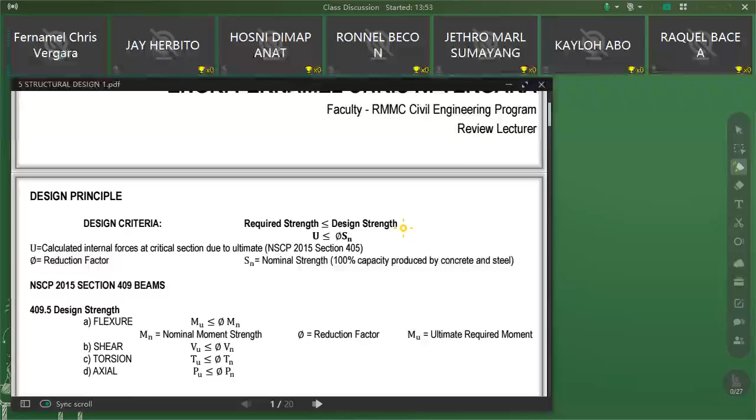So when you say ultimate strength design, it is following the load combination. Magkakaroon na tayo ng load combination dito sa ultimate strength design. Unlike doon sa WSD or working stress design na wala pa tayong load combination kapag nag-a-add tayo ng working na dead load at saka ng live load.

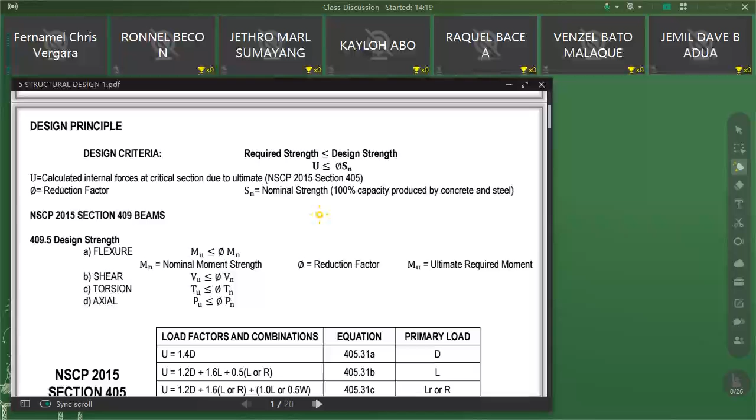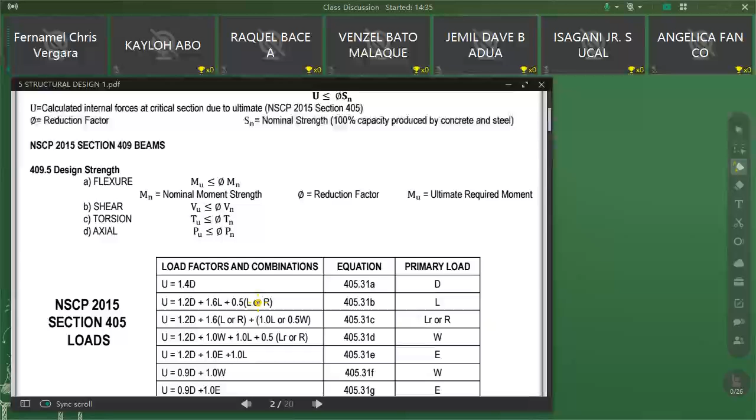Kung mapapansin nyo doon sa example na binigay ko sa inyo, kapag ina-add natin yung dead load tsaka live load, gumagamit tayo ng load factor in combination. So here are the different load factor and combination na ginagamit natin. But actually for the very common combination here is the first one, the second, and yung may mga earthquake.

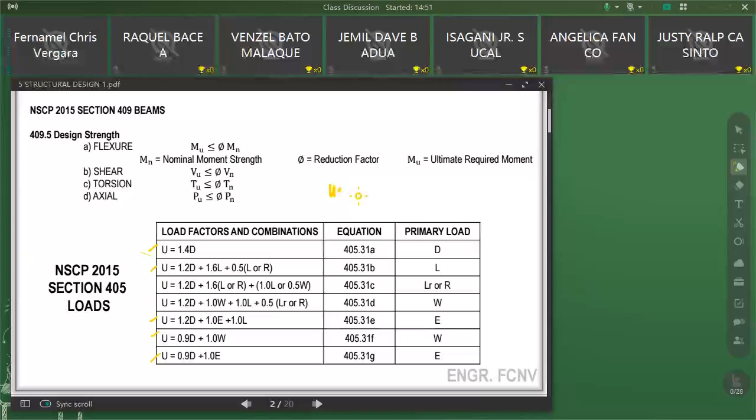Ito sila yung mga combination na magagamit talaga natin, parati talagang nagagamit. At saka kung sa board exam naman yung pinag-uusapan, yung load combination ng 1.2 dead load plus 1.6 live load, yan yung pinaka-common. So sa halos lahat ng problem na makikita nyo, ito yung ginagamit, kasi halos ng binibigay lang dito is dead load and live load lang.

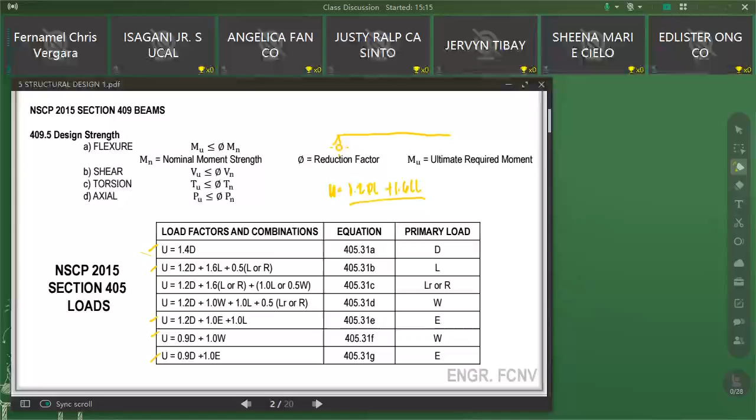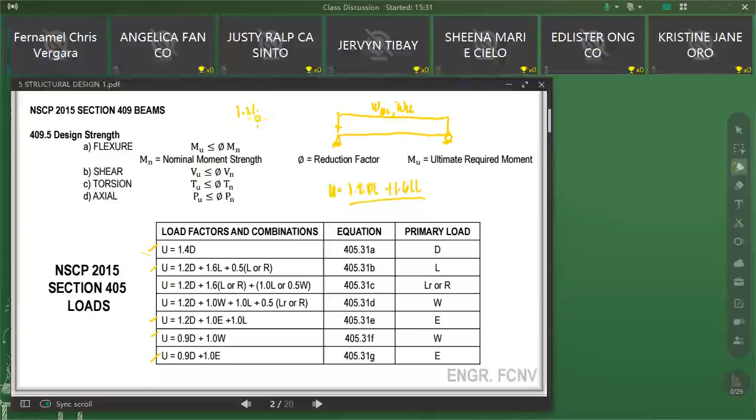So if you combine two loads, kunwari magko-combine ka ng dalawang load, say for example doon kasi sa WSD kapag nagko-combine tayo ng dalawang load, ina-add lang diretso natin. So for example, meron tayo dito W ng dead load and W ng live load. So kapag gusto mo yan silang i-add, you need to use the load combination 1.2 W dead load plus 1.6 W live load to get the ultimate load here because this is ultimate strength design.

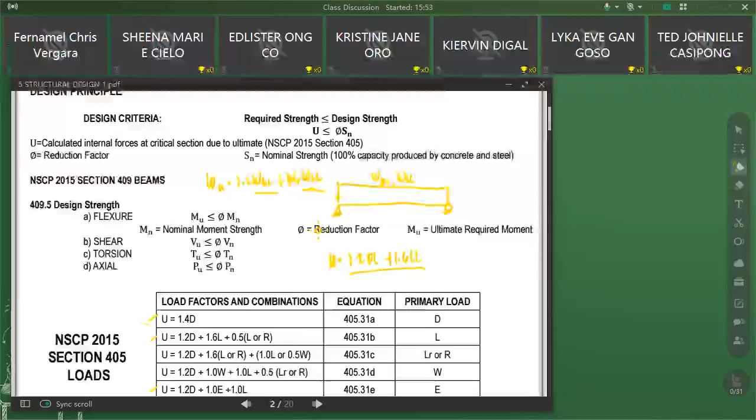Kapag WSD naman yung previous topic natin, pwede mo lang i-add diretso tong W live load and W dead load. So i-add mo lang yan diretso, no need to load factor doon sa WSD. Since service loads yung mga ginagamit natin kapag WSD, mga service load, hindi ultimate load.

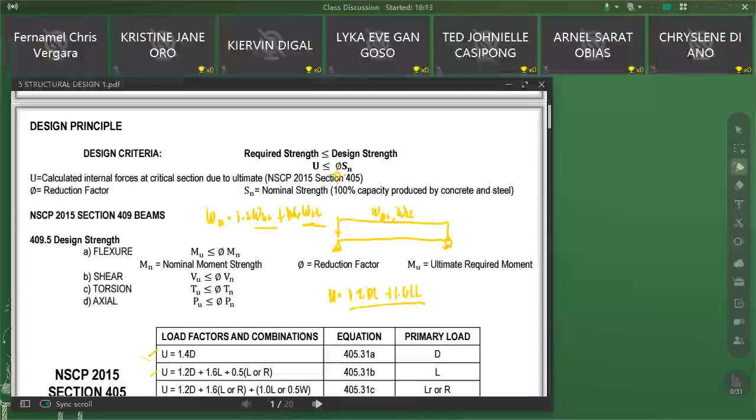Dito ultimate kasi yung ginagamit natin. So sabi dito sa USD, from the design criteria, the required strength U should be less than or equal to the reduction factor times the nominal strength or the design strength. This is what we call the nominal strength.

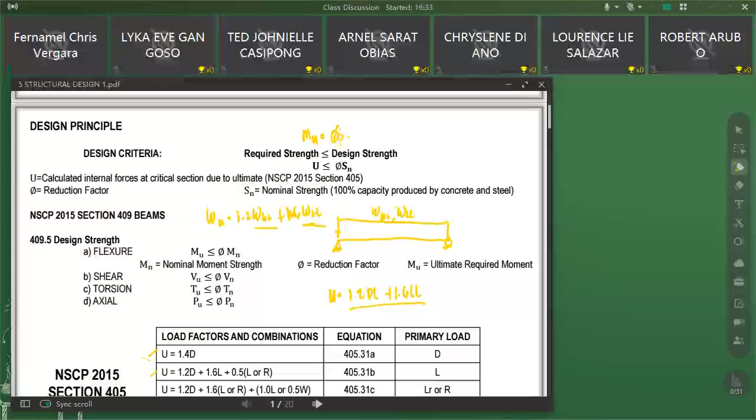So dito sa flexure on beams, ang magiging concern natin dito, of course, from the word flexure is yung bending, yung moment. So if you want to get the ultimate bending moment, it is equal to the reduction factor times the nominal moment. So ito yung magiging equation natin for the ultimate bending moment, which is yung halos concern natin talaga dito, kapag flexure on beams.

So okay, ayun, nakalagay naman dito. The ultimate moment should be less than or equal to the nominal moment times the reduction factor. So phi here is the reduction factor, Mu is the ultimate required moment, and Mn is the nominal moment. So for the shear, this is the ultimate shear, nominal shear.

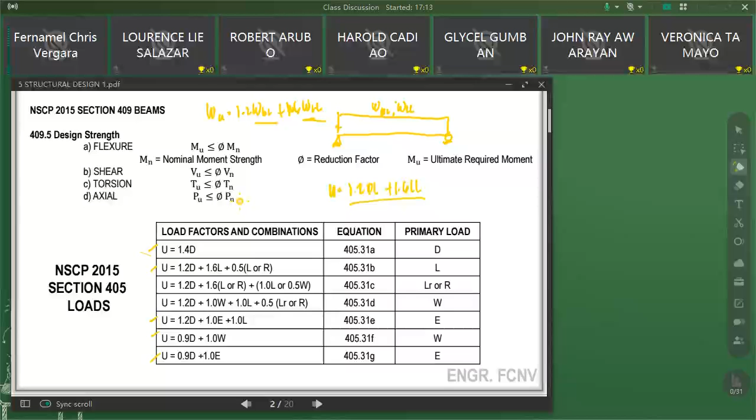Ultimate torsion, nominal torsion, ultimate axial load, nominal axial load. So, parang ganyan lang yan.

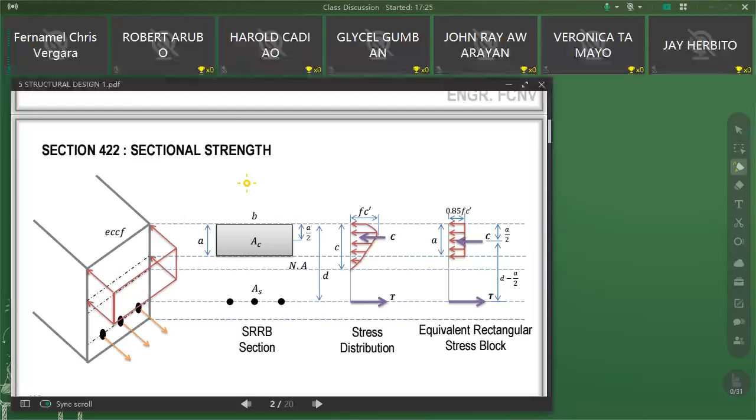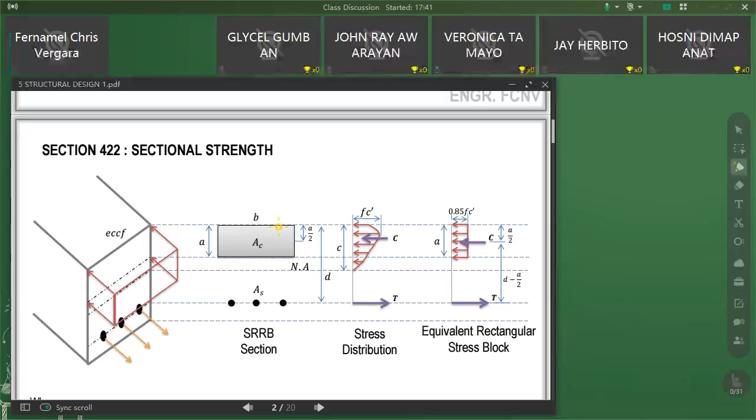Sa analysis ng USD, halos magkaparehas lang sila dun sa WSD, 'no? Ang magiging figure lang natin dito is medyo iba lang siya. Kasi dun sa WSD, yung ginagamit natin na area ng concrete doon is yung whole area na nasa taas ng neutral axis, 'di ba? Kapag kinuha natin yung beam natin, yung buong area dito sa taas ng neutral axis, yun yung kino-consider natin sa WSD, 'no? Dun sa previous topic natin, yung prelim topic natin.

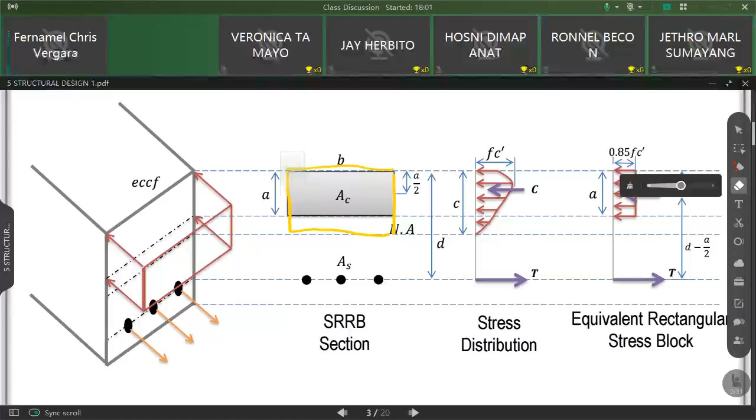But for the USD, Ultimate Strength Design or LRFD, 'no? Ang ginagamit lang natin dito is a part, part lang siya ng compression concrete. This is the compression side, part lang siya ng compression concrete dito. Hindi natin ginagamit yung whole concrete dito sa compression side. So yung concrete dito na ginagamit lang natin, yung area ng compression concrete na ginagamit lang natin dito is may depth na siya A, may depth siyang A, 'no? Doon kasi sa WSD, yung whole area dito sa compression side, yun yung ginagamit natin.

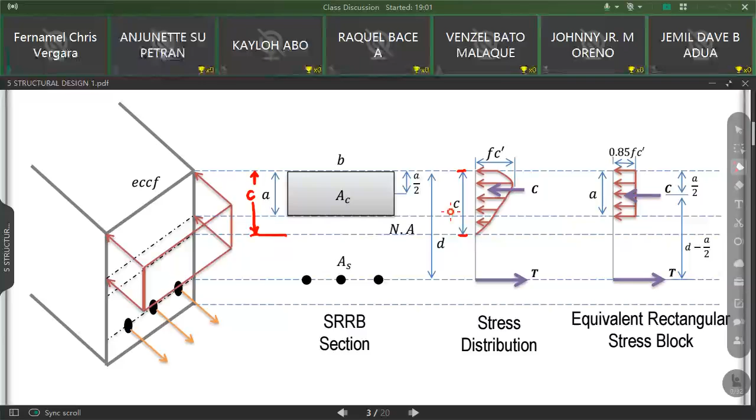And then may depth yun na X, 'di ba? May depth na X. Dito naman, at yung X doon sa WSD, yung definition ni X is the distance from neutral axis to the outermost compression fiber. So dito naman, yun naman si C. Itong si C is the distance from neutral axis to the outermost compression fiber. Pero itong C na 'to, hindi na 'to siya ang depth ng concrete na nagre-resist ng bending dito. Yung depth ng concrete na nagre-resist ng bending sa USD or sa Ultimate Strength Design is itong si A na lang.

Kung doon sa WSD, ulitin ko, yung whole concrete sa compression side yung ginagamit natin, dito sa USD naman, hindi na natin ginagamit yung whole, part lang ng compression concrete yung ginagamit natin, which is itong area na A times B. Ito lang yun, okay? So ngayon, ang procedure dito is ganito lang yung gagawin nyo.

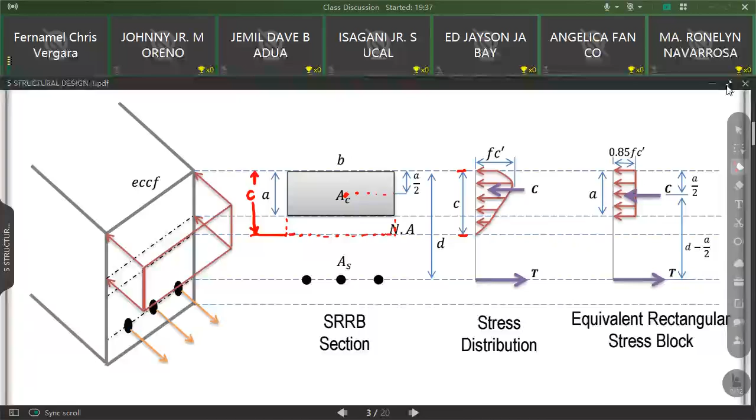First is, idodraw mo yung cross section, parehas pa rin, no? Idodraw natin yung cross section. After mong madraw yung cross section ng ating beam, ika-crack mo na yan. Okay, say for example, this is AS, singly reinforced na lang muna. Ika-crack mo yan dun sa may neutral axis niya banda. If na-draw mo na or naka-assume ka na ng horizontal line which represents your neutral axis, i-draw mo na yung concrete, part lang ng concrete sa taas.

Say this is the concrete, the part of the concrete which will resist the compression, or the bending, okay? For the compression side. So ito may depth na A and ito may depth na C. Then, here, you have AS.

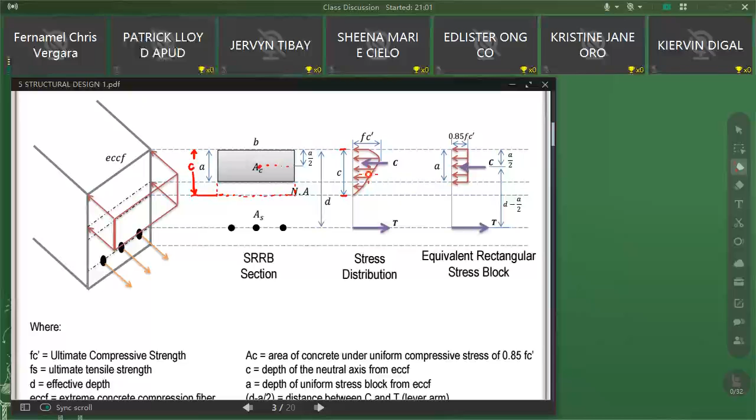Now, for WSD, hindi tayo pwedeng mag-analyze ng steel at saka concrete ng sabay, no? So ang ginagawa natin dun sa WSD, kung matatandaan ninyo, kino-convert natin si steel into concrete. Pero dito, sa USD or Ultimate Strength Design, ang ginagawa dito, hindi na natin kino-convert yung steel sa concrete. Hindi na natin kailangan i-convert ito sa concrete kasi yung ina-analyze dito is mga forces na, 'no? Unlike doon, yung mga area yung ina-analyze kasi doon, eh, nakabase sa area at saka nakabase sa flexural stress formula sa MC/I. So kapag gagamit ka kasi ng MC/I, dapat homogeneous yung section. Dapat isang element lang. Kung steel, steel lang. Kung RC, RC lang. But for the USD, for this topic, hindi na natin kailangan i-convert yung ating bakal sa concrete. Kasi forces naman yung ating ina-analyze dito.

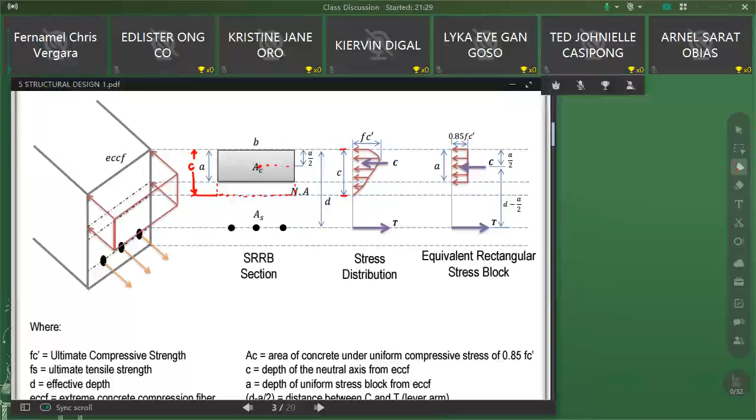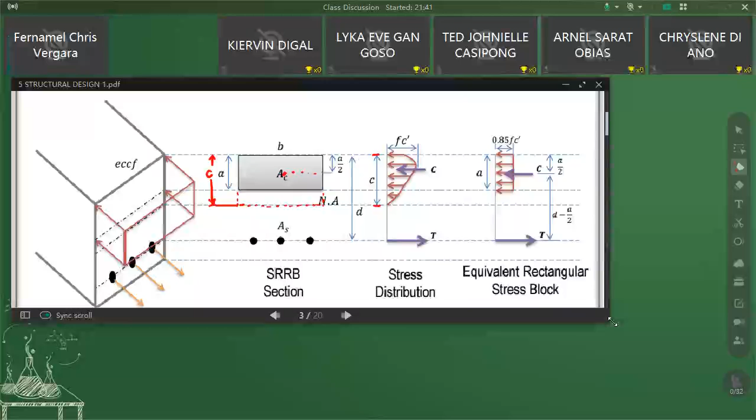Okay, ngayon, if na-crack na natin yung ating beam, and then, hanap mo na si A, si C, at saka yung effective depth. Of course, alam niyo na siguro kung hanapin si effective depth, kasi napakaimportante ng effective depth. So, okay, ito gagawin ko. Wait lang, gagawin ko dito.

Ganito. So, if na-crack mo na yung iyong beam, ganito yung makikita mo dapat, 'no? Yung part lang ng concrete sa taas ng neutral axis, ayan. Hindi siya aabot sa neutral axis, eh. So, this is your A, which is the depth of the compression block that will resist the bending. And this is C, which is the distance from neutral axis to the extreme compression concrete fiber.

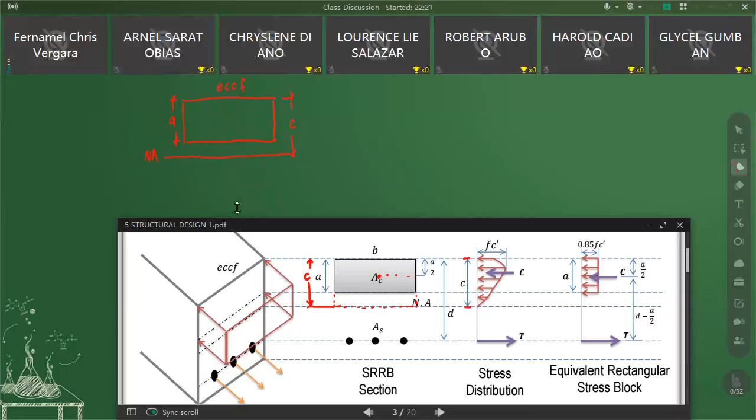And this is AS. Now, let's expose the forces here. The steel here is on the tension side, this is for the tension side and this is for the compression side. So the steel here, of course, has a tensile force.

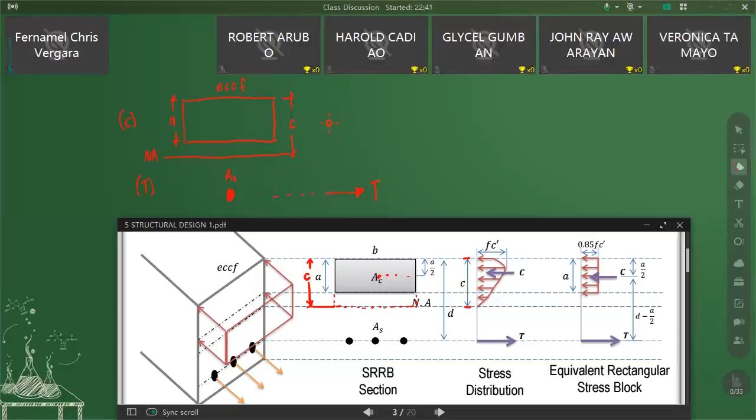And up here, get the centroid or center of gravity of the compressive area of concrete remaining. Since this is rectangular, its center of gravity is right in the middle. Then get the distance going up. If this is A, this will be A over 2. And going down, this will also be A over 2. Now, at its centroid, the compressive force C will act.

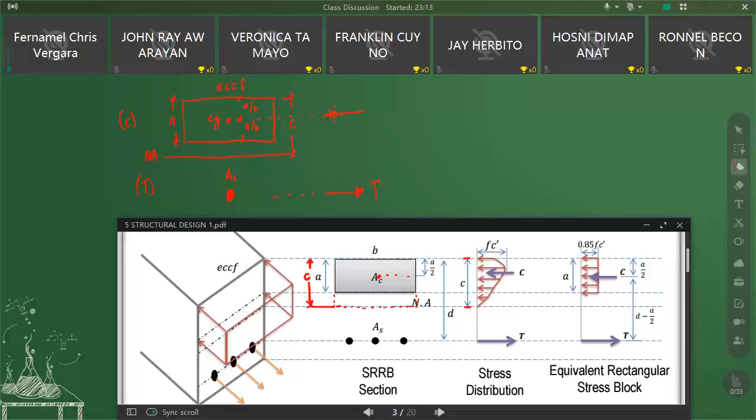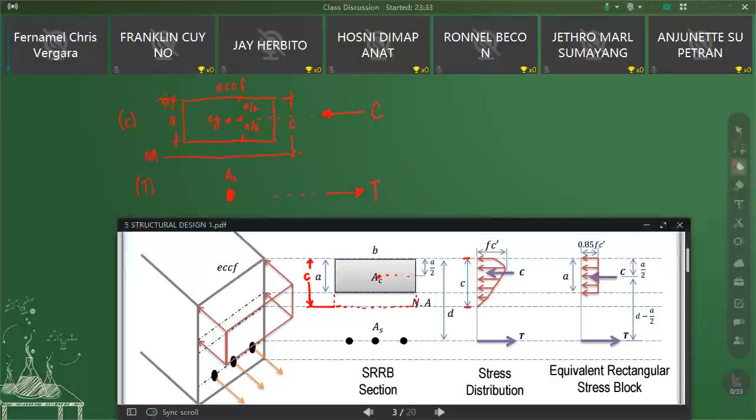You might get confused here. This small c, this is the distance from the neutral axis to the outermost compression fiber. This big C, this is a force. This is a force. Now, we also get the distance from the extreme compression fiber going to AS. If you remember, this is your effective depth D. That is the depth.

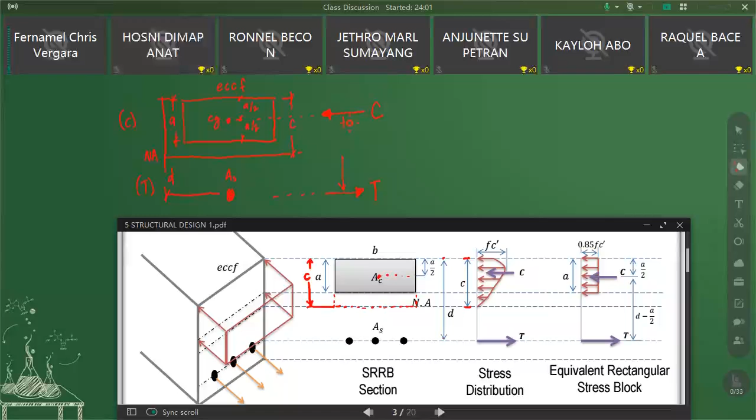Here, going to the area of steel. Centroid of steel, going to the extreme concrete compression fiber. That is your effective depth D. So therefore, if that is the effective depth D, then this moment arm here from the two forces, C and T, will be equal to D minus A over 2.

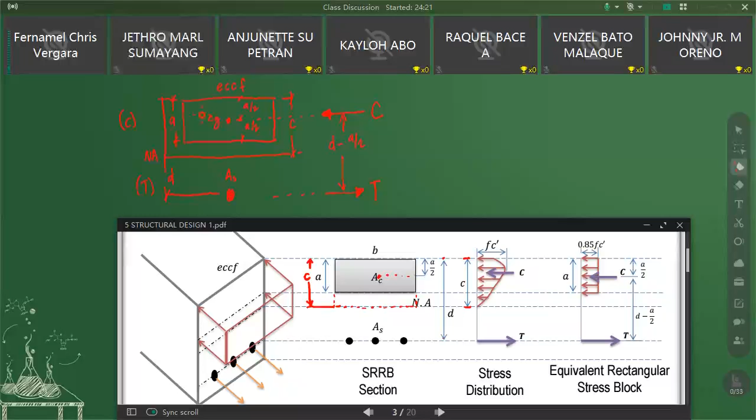This might be familiar to you. When you have two forces positioned like this, with a distance between each other, this creates a couple, which is the moment produced in our beam. This will be the interior and will represent the nominal moment created in the beam. So this will be the direction of the moment here. This is your couple which will represent the nominal moment.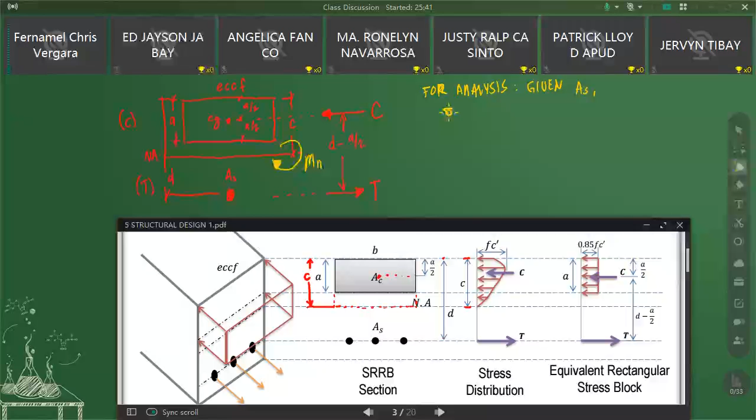And the first step you do is sum up forces horizontal equal to 0. Say rightward force here is positive. So therefore, you have T minus C equal to 0. Therefore, you have tension equal to compression.

So after that, you will substitute the equivalent of these forces. What's the equivalent of T? T is equal to AS, Fs when non-yielding. When it yields, this Fs will be replaced by Fy. AS, Fy. I hope you watched the video I sent you to recap this.

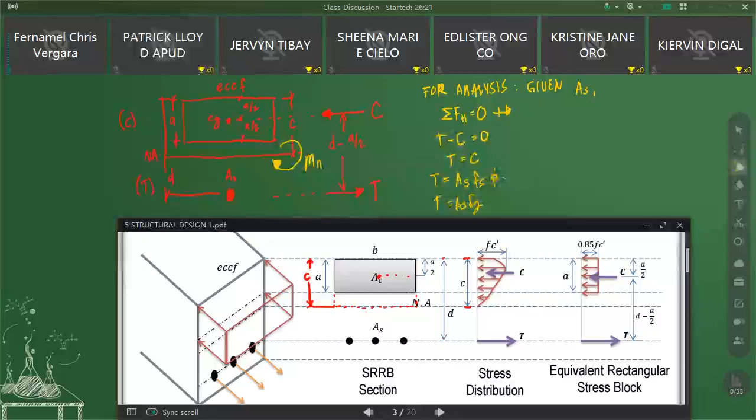Then compression, C, this is equal to the stress of concrete. As you can see, C here is the compressive force due to this concrete. So now, the equivalent of force C, capital letter C, this is equal to the stress times the area of the concrete block. So what's the stress of concrete here in USD?

For USD, the stress of concrete is 0.85 FC prime. And how much is it for WSD? The stress for WSD is 0.45 FC prime, if you remember. Our FC, which is the stress of the concrete, is 0.45 FC prime in WSD, from our previous topic. But for USD, it's 0.85. So, its stress is made larger here. In USD, it's like we're maximizing the strength of the concrete.

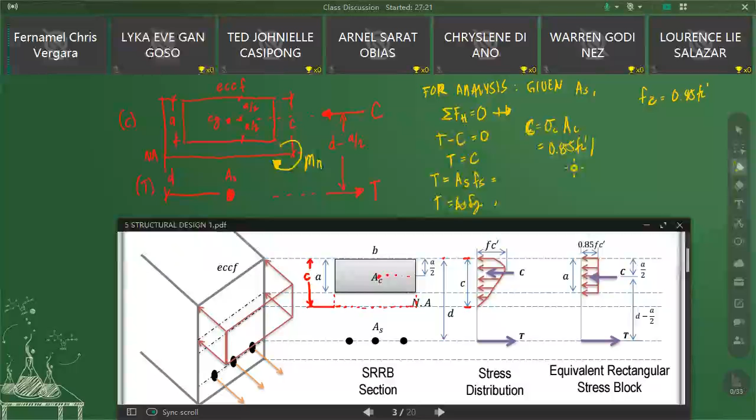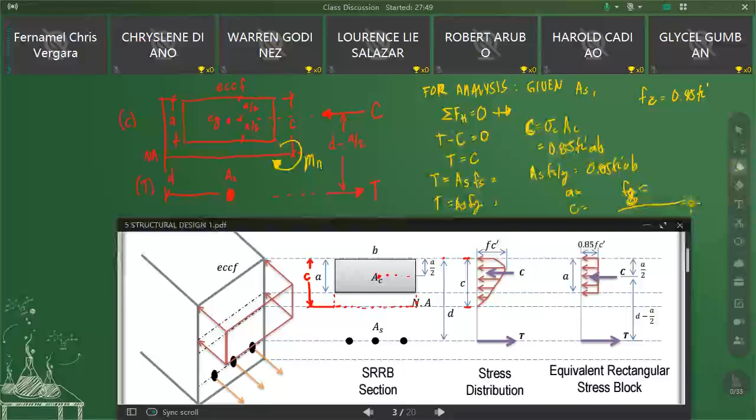So yung area dito is yung area ng concrete block na resist sa bending. Ang may iwang area dito, you have the depth A times B, so the area will be AB. And after that, you equate this to AS, FS or FY equal to 0.85 FC prime AB. And then you get A. After you get A, you get C. And then you solve for FS. You check for FS, madadaanan naman natin yan mamaya sa example.

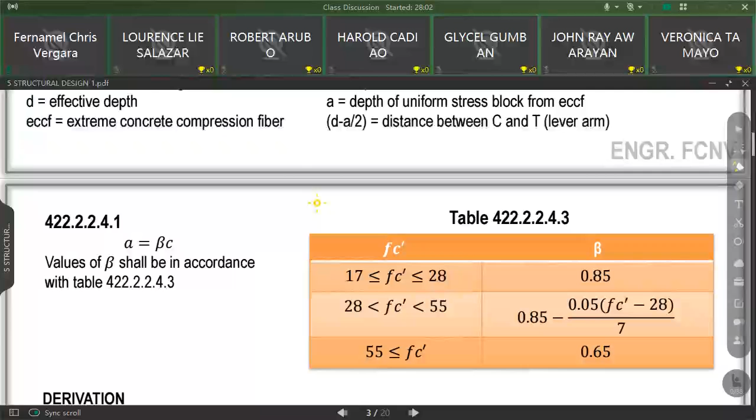Okay na siguro yan. Introduction lang yan. So ngayon, titignan naman natin yung ibang formulas na dapat tandaan dito. Dito sa module niyo binigay ko naman to. Yung formula for A, which is equal to beta times C. Ito yung relationship ni A and ni C. So si A daw is equal to beta times C.

So your beta naman is base sa value ni FC prime. Kapag gumagamit ka ng value ni beta, titignan mo parate yung FC prime. Tandaan yan ha, kapag gumagamit ka ng value ni beta, titignan mo yung value ni FC prime. Kapag yung iyong FC prime na binigay sa problem is greater or equal to 17 but less than or equal to 28, yung iyong beta is magiging 0.85.

Kapag naman yung FC prime is greater than 28 but less than 55, yung iyong beta naman will be based on this equation. Kunwari, 30 yung FC prime mo, so nabebelong siya dito, sa greater than 28 but less than 55. So ilagay mo lang yung 30 na FC prime and you will get the value of beta based on this equation.

Now, for FC prime naman greater or equal to 55, ganito yung dapat nilagay. Ayan, mas maganda kung ganito mo yung nilagay. For FC prime greater or equal to 55, kapag mas malaki na siya sa 55, yung beta natin is equal to 0.65.

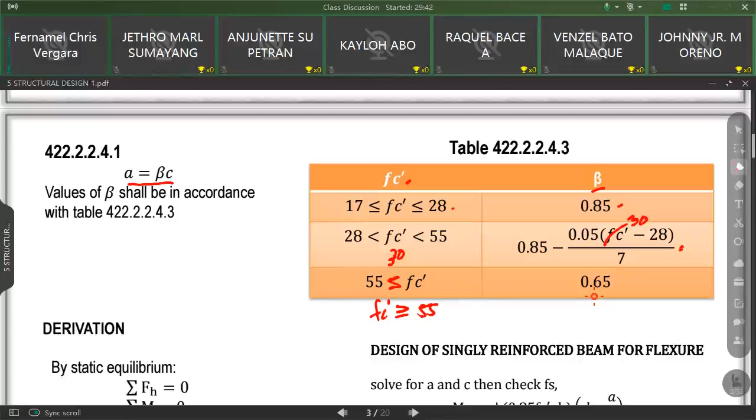So base dito, kung titignan ninyo, the maximum value for beta is 0.85 and the minimum value of beta is 0.65. At kung makikita nyo dito, habang lumalaki yung FC prime, papaliit naman yung ating beta. So FC prime is indirectly proportional to beta. Hindi siya directly, kung directly sana, kung lalaki yung isa, lalaki din yung isa. But for this one, kung lalaki yung FC prime, liliit yung beta. So they are indirectly proportional to each other.

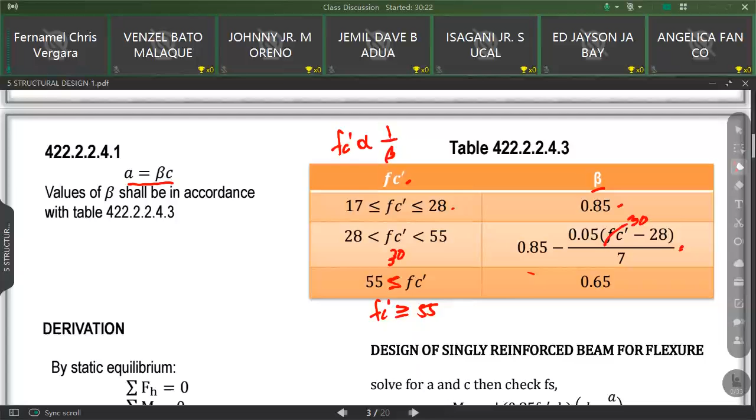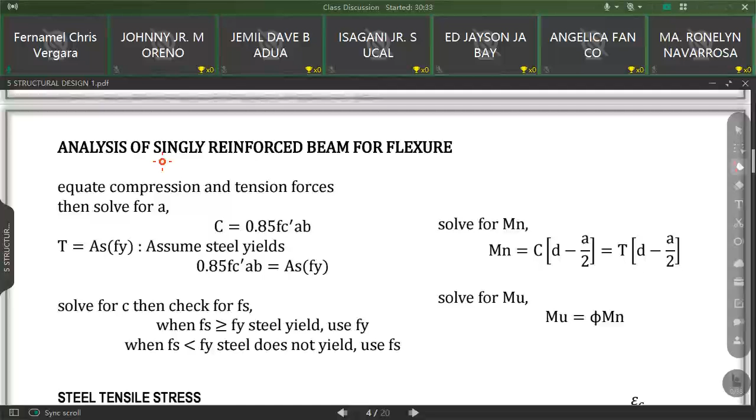So dito, yung mga derivation ng formula nakalagay naman dito. Actually, this is the analysis, analysis of singly reinforced beam for flexure. So ang unang ginagawa dito is you equate compression and tension forces, then solve for A. Nakalagay yung procedure, oh. So ito na yung 0.85 FC prime AB equal to AS FY because if we analyze the flexure on beams using USD, we assume the steel will yield and then we check for it if it yields or hindi.

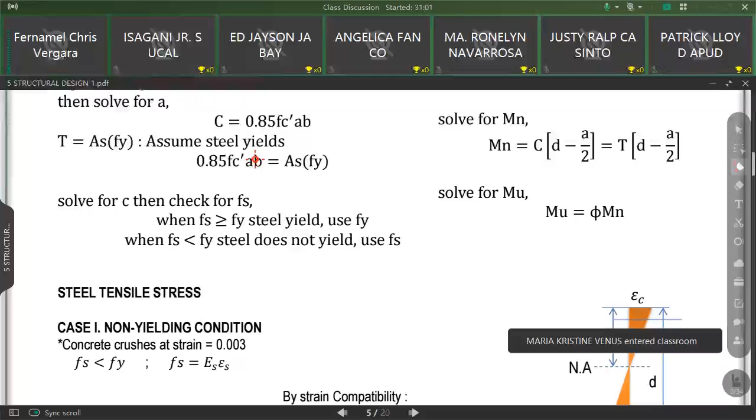Kung mali yung assumption natin, then balik tayo. So may example tayo mamaya. Solve for C, then check for FS, susundin lang talaga natin to. Then solve for the nominal moment and then solve for MU. So itong mga procedure na nandito, susundin lang talaga to natin.

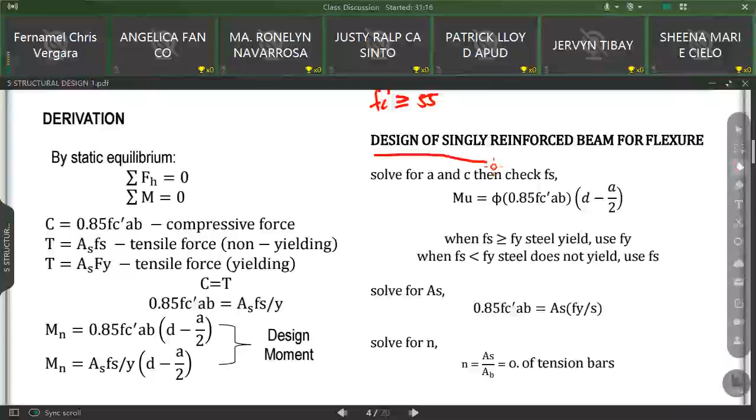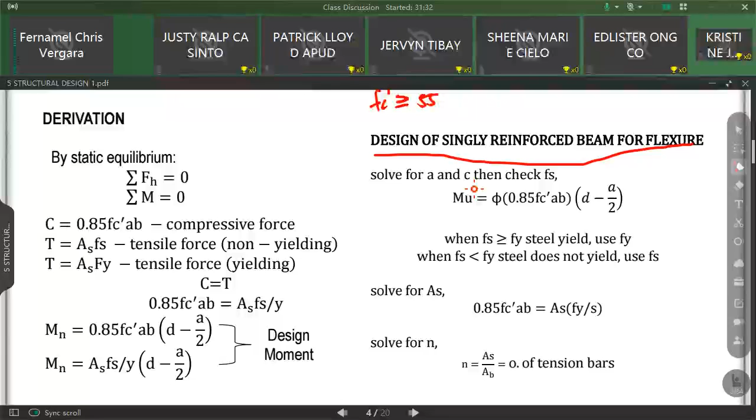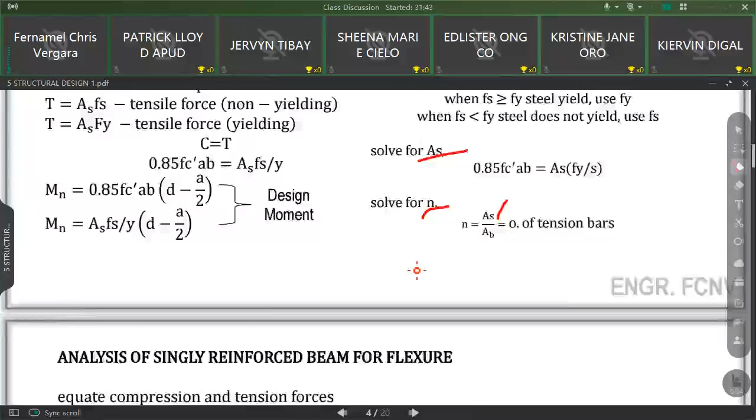Ito naman yung nandito, nauuna pala yung design of singly reinforced beam. Kapag design of singly reinforced beam, ang una mong masosolve dito is si A. Sabi dito, solve for A and then C, then check FS. Yan yung nakalagay dito. So given naman yung MU dito, ang hahanapin mo naman dito is yung AS. Solve for AS and solve for the number of bars kung ilan yung kailangan. I hope naintindihan nyo to.

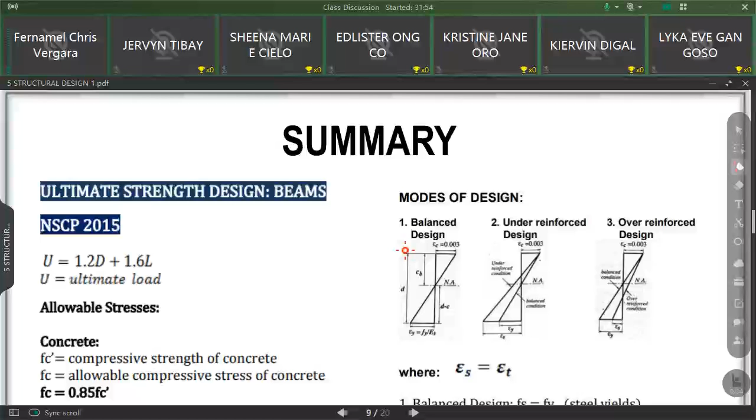So I have a summary here of those formulas na binigay ko. Nakasummary na yan dito. Dito, sa ultimate strength design ng beams, using NSCP 2015.

Dapat gamitin natin dito ay 2015 na code, since ito na yung ginagamit o latest na NSCP na ina-adapt na ng ating organization, ng PICE. So for the load combination of dead load and live load, we have 1.2 and 1.6 as factors na ginagamit natin.

And then we have the allowable stresses. Yung FC natin dito, ito yung stress ng concrete natin na ginagamit, ang 0.85 FC prime. So this is the maximum stress na ginagamit natin for the concrete. For the steel naman, you have the tensile strength of steel Fy and the allowable tensile strength of steel Fs.

And then you have three modes of design here. We have the balanced design, the under-reinforced design, and the last one is the over-reinforced design.

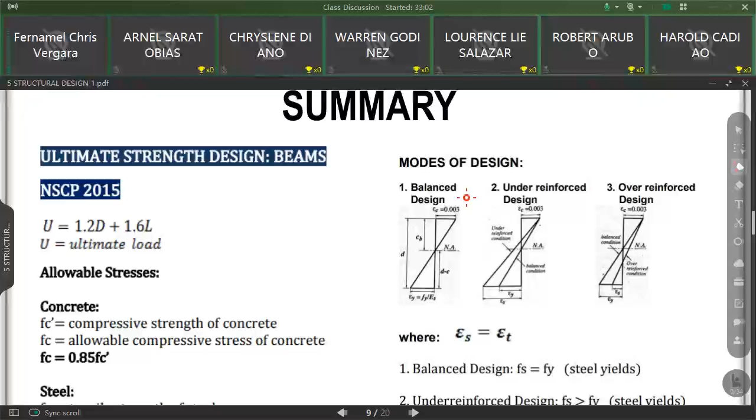I think na-explain to ni Victor doon sa video na pinasa ko sa inyo, kung ano yung design na mas maganda or mas prefer ng mga engineers.

So we have the balanced design, kung saan sabay-sabay yung pag-fail ng concrete at saka ng steel. Kapag under-reinforced naman, ang ibig sabihin, kulang siya sa reinforcement, kaya magfi-fail na yung steel, hindi pa magfi-fail yung concrete, kaya tinatawag na under-reinforced.

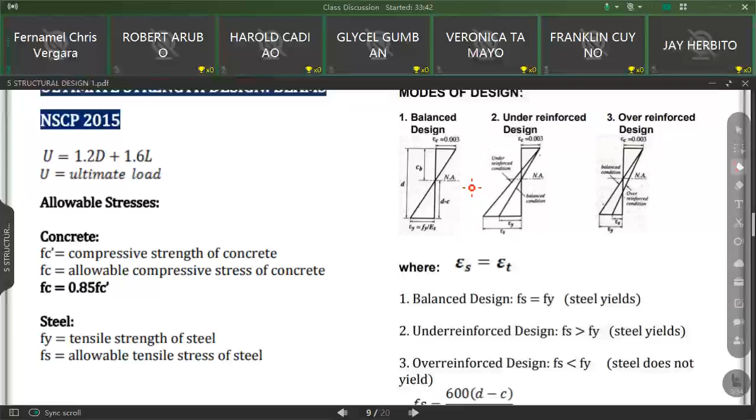Yung over-reinforced naman, from the word over, maraming bakal. So unang magfi-fail yung concrete kaysa kay steel.

For singly reinforced beams, ang tatandaan ninyo dito ay ito: itong beam natin is reinforced for tension only.

Actually, we have discussed already what is the difference ng singly and double reinforced beams, di ba? Doon pa lang sa WSD, nag-solve tayo ng beams na reinforced siya sa compression and tension side, which is double. For singly reinforced, ganito.

Sa tension side lang siya nare-reinforce sa singly reinforced beam. For double reinforced beam, meron sa compression at meron sa tension, AS prime and AS. Dito, AS lang.

Ayan, kung maalala ninyo. Now, how to determine if whether our beam is singly or double reinforced. Now, we have these limitations for the singly reinforced. Sabi dito, ma-define mo lang na singly reinforced yan if yung rho actual is less than or equal sa rho max but greater than rho minimum.

Actually, kahit wag nyo na itong isipin. Basta yung rho actual natin is less than or equal lang sa rho max. Kasi minsan talaga bumababa yung ating rho actual kaysa kay rho max.

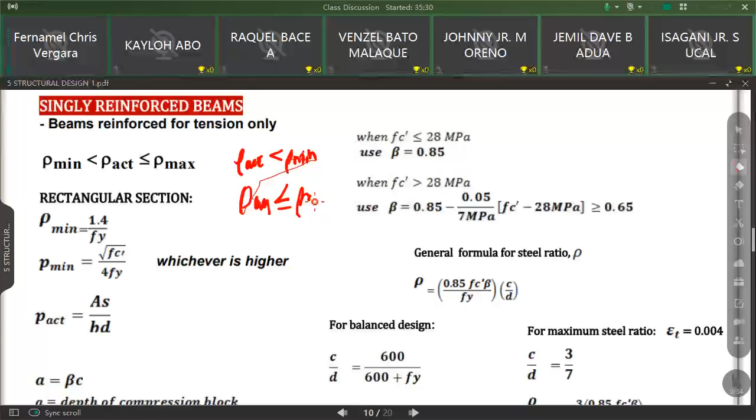Pwedeng mangyari na yung rho actual natin is less than siya kay rho minimum, tapos less than din siya kay rho max. Therefore, ang rho actual ay nandito and ang rho minimum ay nandito. Ang ibig sabihin lang yan, napakaliit ng ating bakal na nilagay.

Kasi yung rho actual, yun yung formula for rho, As over bd. So kapag maraming bakal, mas lalaki to. Pero kung mas maliit lang yung bakal, under-reinforce ka, liliit to. Minsan, liliit pa yan sa rho minimum.

Pero hindi kasi natin dapat gamitin yung rho na mas maliit sa rho minimum. Ito yung limitation natin. Ang tatandaan ninyo dito, kapag nagsosolve kayo, lalo na kapag design, sa design lang naman ito magagamit. Kapag nagde-design kayo, kapag meron kayong rho actual, sinolve nyo to, nakakuha kayo ng value, and then meron kayong rho minimum, nakakuha din kayo ng value, at rho max din, nakakuha kayo ng value.

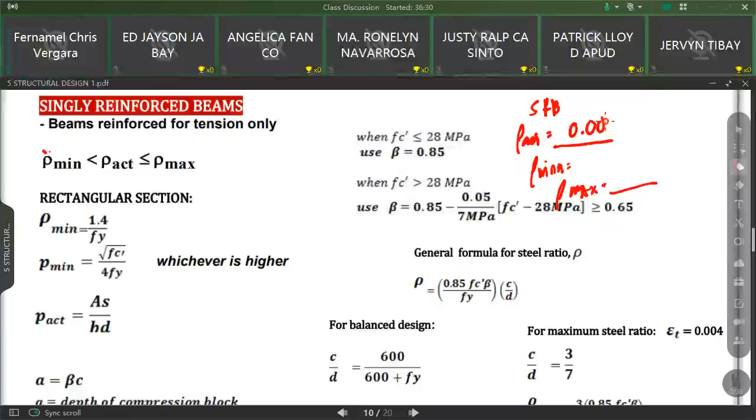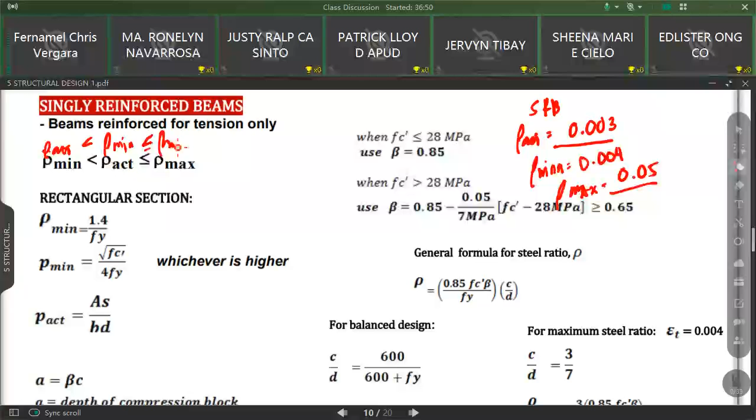Yung gusto nyong design is singly reinforced beam. Kapag ito ay 0.003, yung rho max naman 0.05, at ito naman 0.004. Kung makikita nyo dito, yung rho actual is less than this 2, meaning mas maliit pa siya sa rho minimum at mas maliit pa siya doon sa rho max. So mas maliit yung rho actual sa rho minimum at saka rho max.

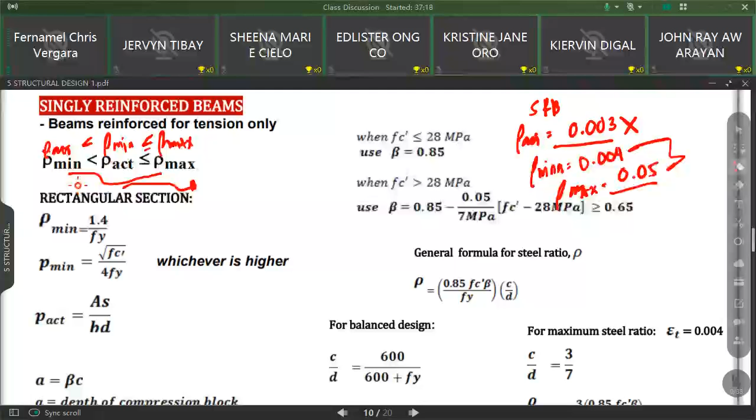Now, hindi puwede na mas maliit itong rho actual sa rho minimum. Ang gagawin mo dito, hindi mo 'to i-a-adapt, hindi 'to puwede. Ito yung limitation natin for singly reinforced. Meaning, dapat yung values natin is within this range lang, within the rho minimum and rho max lang yung ating values. So kapag bumaba ka sa rho minimum, yung rho minimum yung gagamitin mo. You will not adapt this, you will use this as your value.